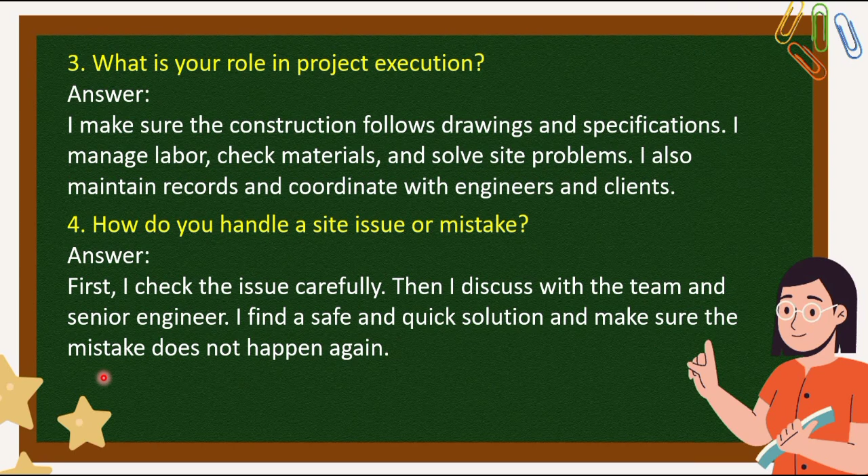Fifth question, what software do you use? The answer is, I use AutoCAD for drawings, MS Excel for reports and calculation, and sometimes Primavera or MS Project for planning. I also use estimation and billing tools.

Sixth question, what is the importance of safety on site? The answer is, safety saves lives and avoids accidents. It also saves time and money. I make sure workers wear PPE and follow safety rules like scaffolding, proper lifting, and warning signs.

Seventh question, how do you check quality on site? The answer is, I check materials, workmanship, and curing. I follow codes and standards. I also do cube tests, slump tests, and other field tests regularly.

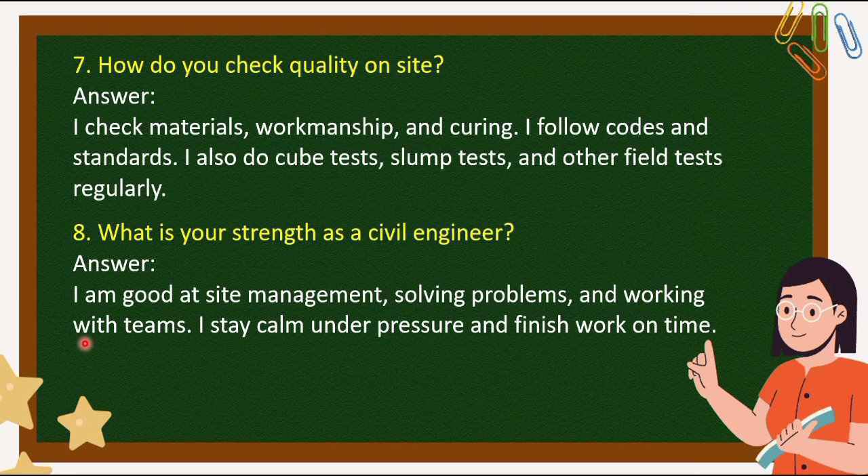Eighth question, what is your strength as a civil engineer? The answer is, I am good at site management, solving problems, and working with teams. I stay calm under pressure and finish work on time.

Ninth question, what is the difference between QA and QC? The answer is, QA, quality assurance, is a process to prevent mistakes. QC, quality control, is checking the actual work quality by testing and inspection.

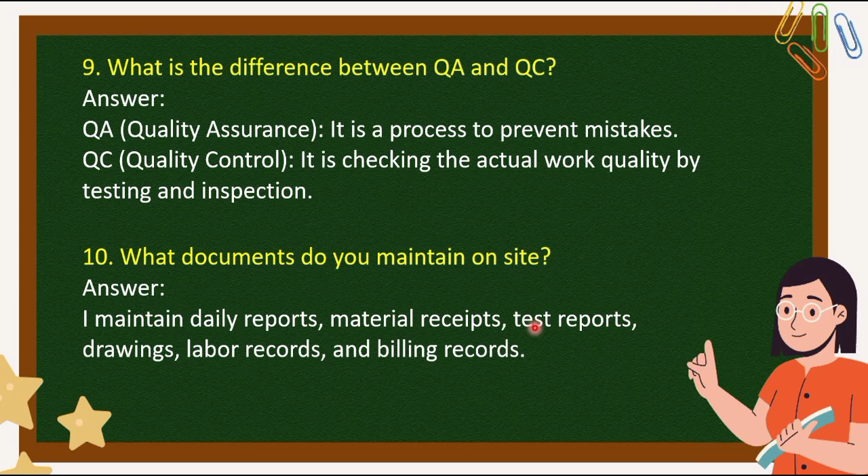Tenth question, what documents do you maintain on site? The answer is, I maintain daily reports, material receipts, test reports, drawings, labor records, and billing records.

Eleventh question, what is bar bending schedule, BBS? The answer is, BBS is a table showing the details of steel bars: size, length, number, shapes, and cutting length. It helps in steel estimation and avoids wastage.

Twelfth question, what steps do you take for concreting work? The answer is, check formwork, check reinforcement, slump test, pouring concrete, vibrating, curing properly.

Thirteenth question, how do you control wastage on site? The answer is, I use proper storage, train workers, plan materials use, and avoid rework.

Fourteenth question, what is your biggest achievement? The answer is, for example, I completed a multi-story building project 15 days before the deadline with zero safety issues.

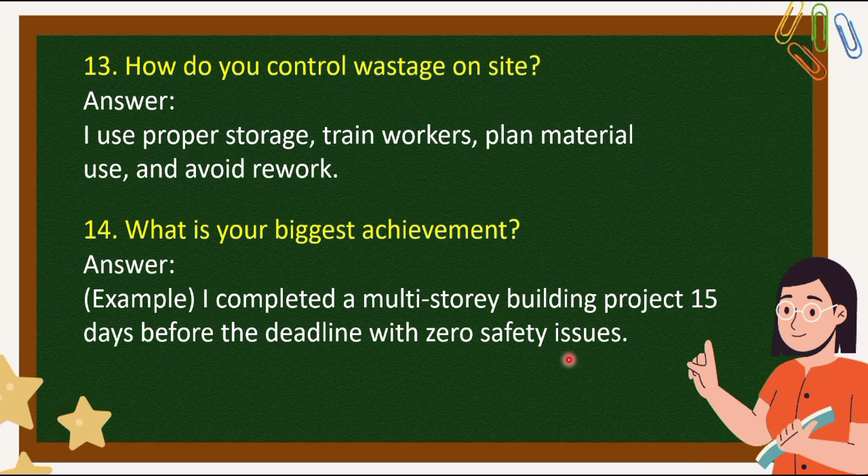Fifteenth question, why should we hire you? The answer is, I have good technical knowledge, field experience, and strong work ethics. I complete work on time with good quality and safety.

Sixteenth question, what is a one-way slab? The answer is, a slab supported on two opposite sides and bends in one direction.

Next question is, what is a two-way slab? The answer is, a slab supported on all four sides and bends in two directions.

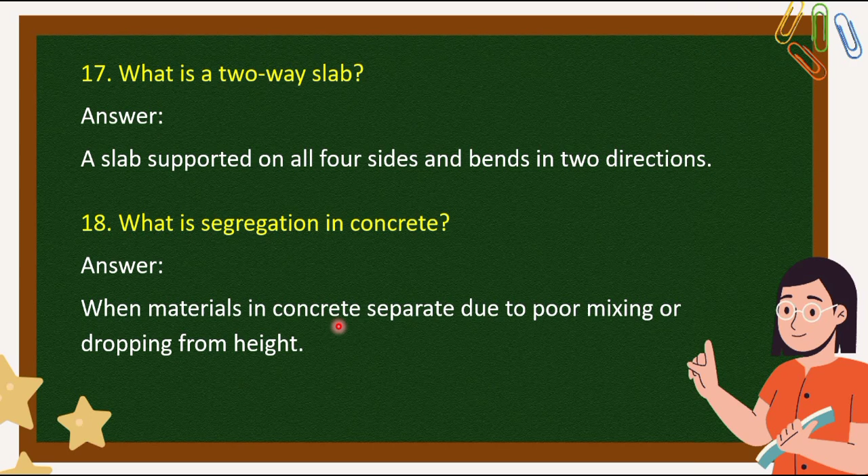Eighteenth question, what is segregation in concrete? The answer is, when materials in concrete separate due to poor mixing or dropping from height.

Nineteenth question, what is honeycombing? The answer is, voids or holes in concrete due to poor compaction or mix.

Twentieth question, what is a slump test? The answer is, a test to check the workability of fresh concrete.

Twenty-first question, what is a retaining wall? The answer is, a wall that holds back soil or water from one side.

What is camber in road? The answer is, a slope in the road surface for drainage of rainwater.

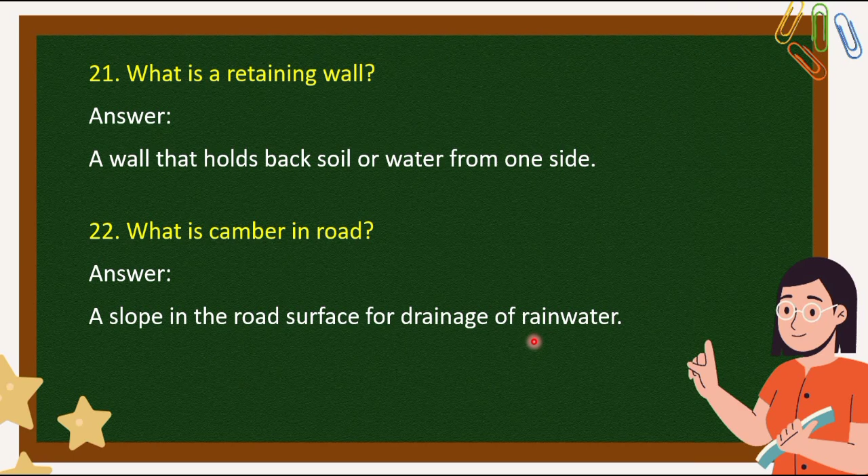Twenty-third question, what is lap length? The answer is, extra length given when two bars are joined to transfer load properly.

Twenty-fourth question, what is development length? The answer is, a length of bar required to safely transfer stress between steel and concrete.

What is pile foundation? The answer is deep foundation where long columns, piles, are used to transfer load to deep soil. What is compaction? The answer is the process of reducing air in soil to increase its strength.

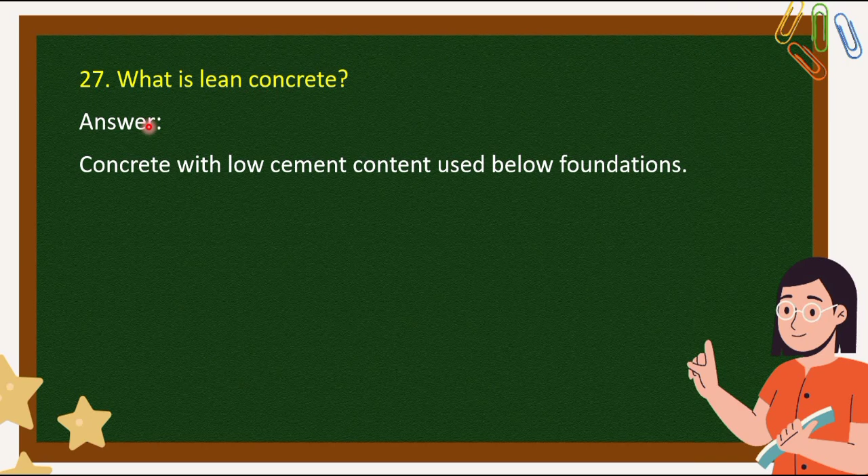What is lean concrete? The answer is concrete with low cement content used below foundations. What is the unit weight of steel? The answer is 7850 kg per cubic meter.

What is bleeding in concrete? The answer is when water comes out from the concrete surface after placing. What is efflorescence in brick? The answer is white powder on brick surface due to salt in water.

What is the minimum cover for RCC? The answer is for slab 15 to 20 mm, for beam 25 mm, for column 40 mm, for footing 50 mm.

What are the types of foundation? The answer is shallow foundations like isolated and raft, and deep foundations like pile and caisson.

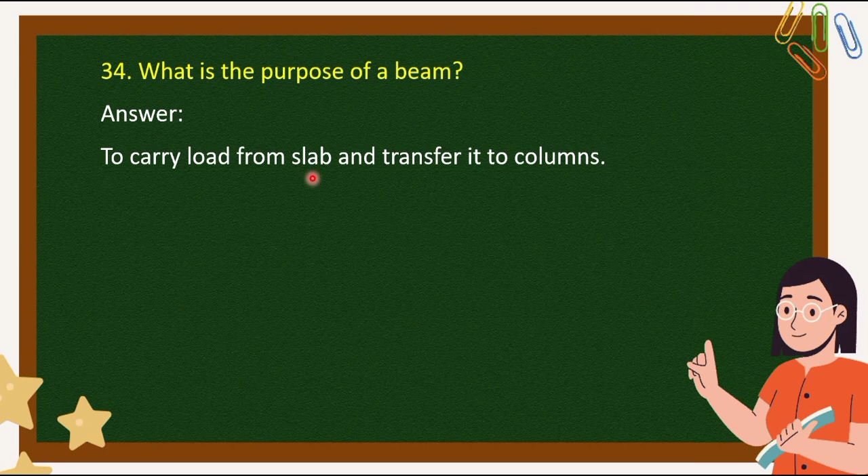What is a footing? The answer is the base part of a structure that spreads load to the soil. What is the purpose of a beam? The answer is to carry load from slabs and transfer it to columns.

What is a concrete grade? The answer is concrete strength after 28 days. For example, M20 means 20 MPa, megapascal.

What is curing time for slab? The answer is usually 7 to 14 days. What is a load bearing wall? The answer is a wall that carries load from above and transfers it to the foundation.

What is the difference between working and as-built drawings? The answer is working drawings are used during construction, and as-built drawings are the final drawings after construction.

What is the purpose of scaffolding? The answer is temporary support for workers during high level construction.

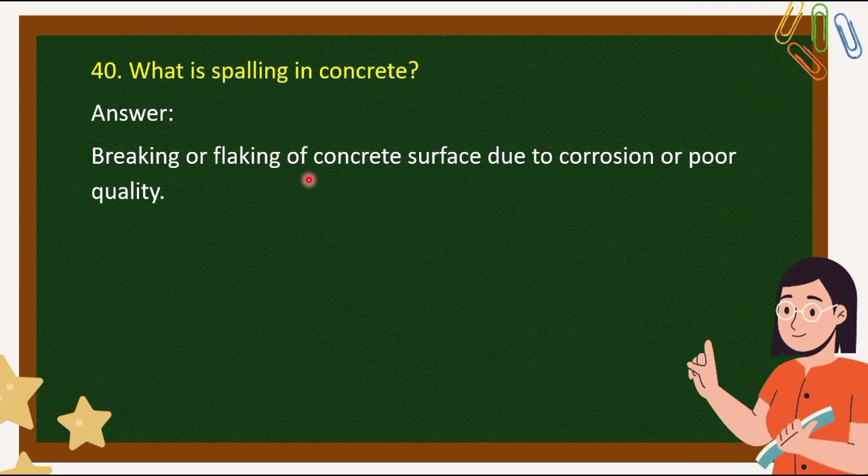What is spalling in concrete? The answer is breaking or flaking of concrete surface due to corrosion or poor quality.

What is shuttering removal time? The answer is for slab 14 days, for beam sides 7 days, and for column sides 24 to 48 hours.

What is a plinth beam? The answer is a beam built at plinth level to connect columns and prevent settlement cracks.

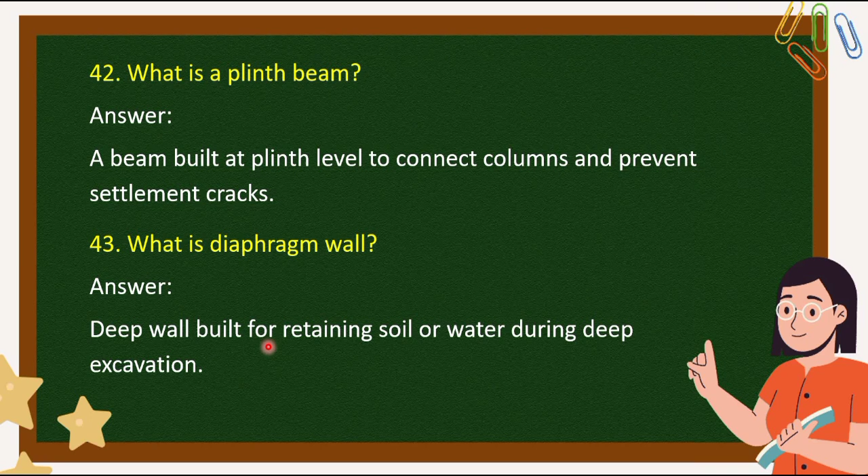What is a diaphragm wall? The answer is a deep wall built for retaining soil or water during deep excavation.

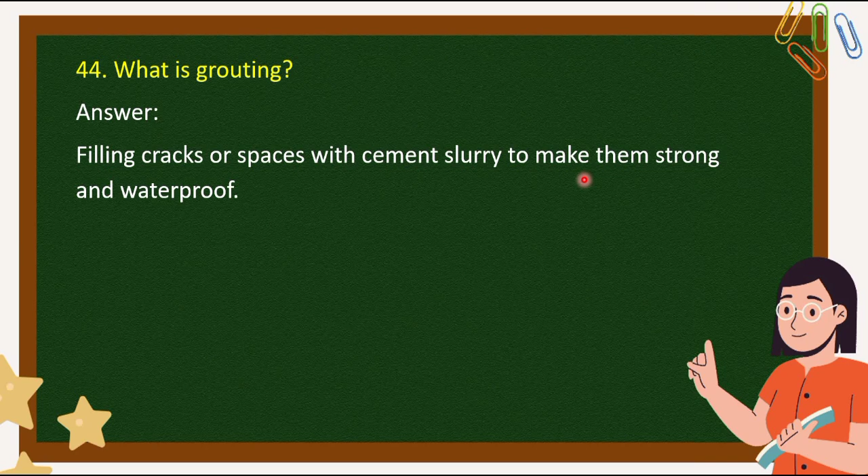What is grouting? The answer is filling cracks or spaces with cement slurry to make them strong and waterproof.

What is water cement ratio? The answer is the ratio of water to cement by weight in concrete. A lower ratio means stronger concrete.

What is pre-stressed concrete? The answer is concrete where steel is stretched before load is applied. It reduces cracks. What is the difference between contractor and subcontractor?

The answer is the contractor is the main company responsible for the project, and the subcontractor is hired by the contractor for specific work.

What is bitumen? The answer is black sticky material used in road construction as a binder.

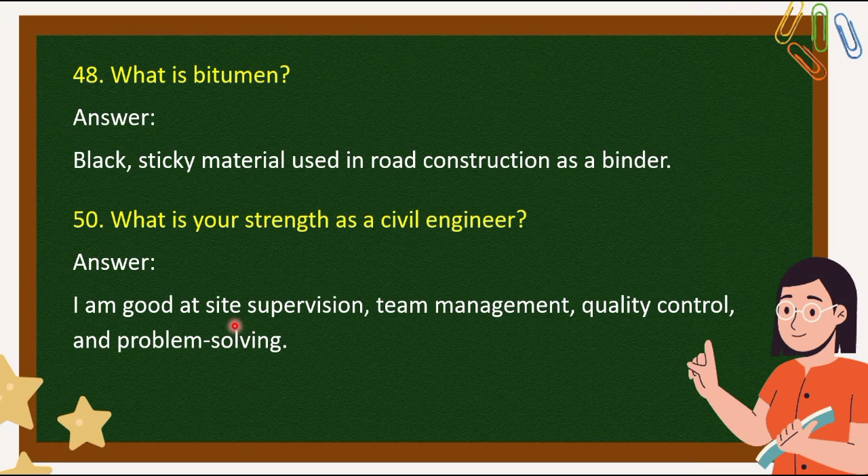What is your strength as a civil engineer? The answer is I am good at site supervision, team management, quality control and problem solving.

What is the purpose of a construction joint? The answer is it allows construction to be done in stages without cracks or weak points.

What is the minimum thickness of a concrete road? The answer is usually 150 mm to 300 mm depending on traffic load.

What is a cover block? The answer is a small concrete block placed under reinforcement to maintain cover.

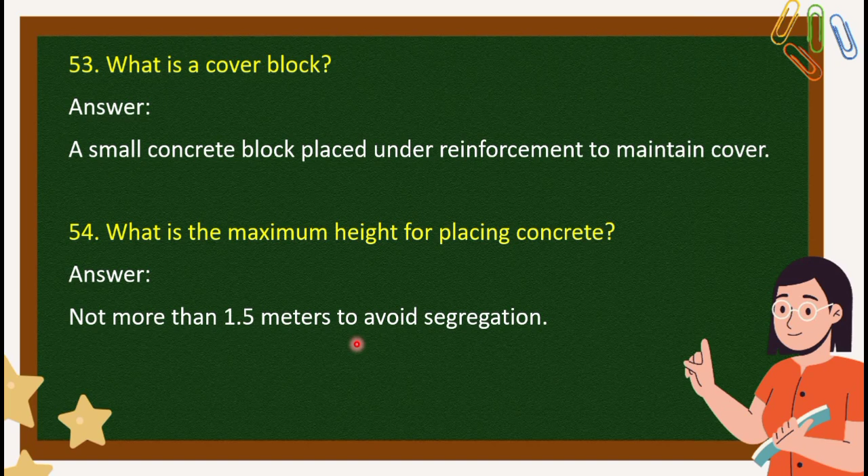What is the maximum height for placing concrete? The answer is not more than 1.5 meters to avoid segregation.

What is a mat raft foundation? The answer is a large thick slab supporting multiple columns, used in weak soil.

What is the role of admixture in concrete? The answer is admixtures improve workability, setting time and strength of concrete.

What is the difference between hardening and setting of concrete? The answer is setting is when concrete changes from liquid to solid, while hardening means concrete gains strength after setting.

What is a cantilever beam? The answer is a beam supported only at one end, like in balconies.

Question 59: What is a tie beam? The answer is a beam that connects two columns to reduce buckling and give stability.

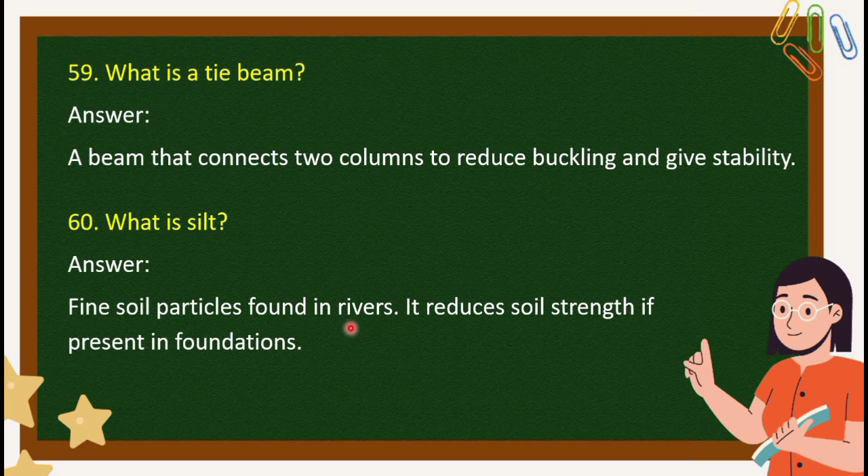Question 60: What is silt? The answer is fine soil particles found in rivers. It reduces soil strength if present in foundations.

Question 61: What is scaffolding made of? The answer is made of steel pipes or bamboo with wooden planks.

What is the typical height of a floor in buildings? The answer is usually 3 meters or 10 feet, including slab and beams.

What is geotechnical investigation? The answer is testing of soil before construction to check its strength and properties.

Question 64: What is a superstructure and substructure? The answer is substructure means below ground foundation. Superstructure means above ground columns, slabs, beams.

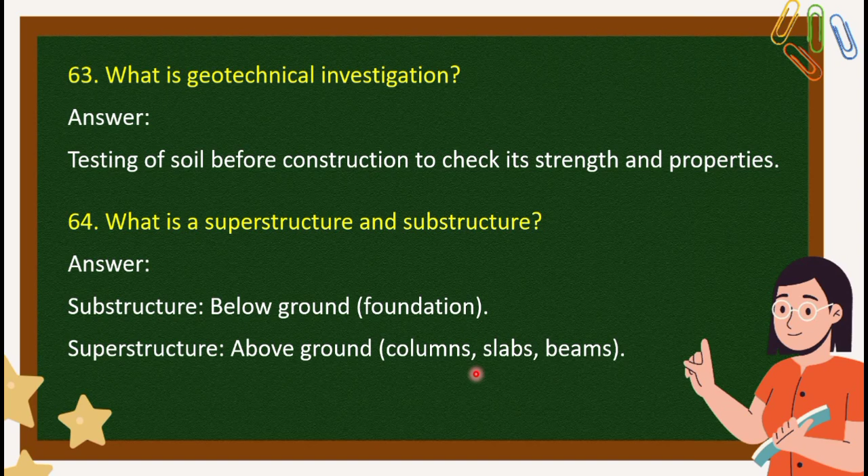Question 65: What is a tender in construction? The answer is a document to invite bids for a construction project.

Question 66: What is a bill of quantities? The answer is a detailed list of materials, labor, and cost for a project.

Question 67: What is the difference between estimation and costing? The answer is estimation means approximate quantity and cost before starting work, while costing means actual expenses after work is done.

What is curing compound? The answer is a chemical sprayed on concrete to retain moisture for curing.

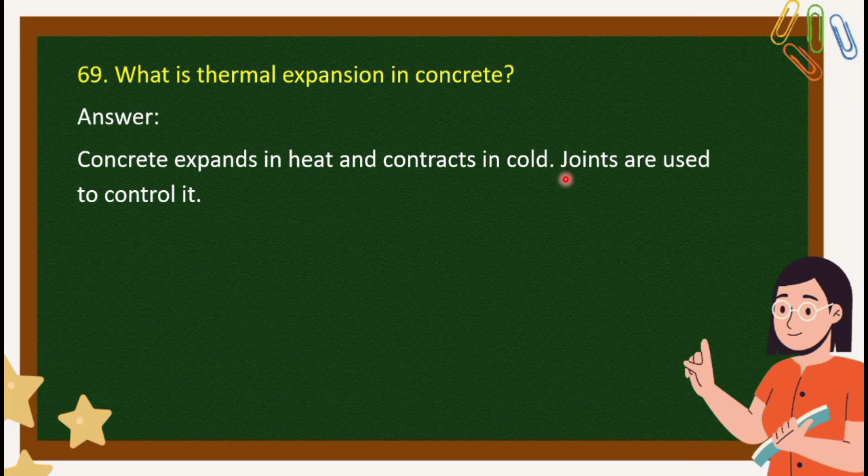What is thermal expansion in concrete? The answer is concrete expands in heat and contracts in cold. Joints are used to control it.

What is the purpose of a dowel bar? The answer is to transfer load and allow movement between concrete slabs.

What is the difference between sand and M sand? The answer is sand is natural river sand, while M sand means manufactured sand from crushed stone.

Question 72: What is a water bar? The answer is a strip placed at joints to stop water leakage.

What is a gable wall? The answer is the triangular upper part of a wall at the end of a pitched roof.

What is a parapet wall? The answer is a low wall at the edges of a roof or balcony for safety.

What is the use of fiber in concrete? The answer is it improves crack resistance and strength.

What is bituminous concrete? The answer is road material made of bitumen and aggregate for flexible pavements.

What is the difference between flexible and rigid pavements? The answer is flexible pavements use bitumen roads, while rigid pavements use concrete roads.

What is shear force? The answer is a force that tries to cut a section of a structure.

What is bending moment? The answer is a moment that causes a beam or structure to bend.

What is the role of a site engineer? The answer is to supervise construction, check drawings, manage labor, and ensure safety and quality.

Question 81: What is a construction schedule? The answer is a timeline of tasks in a project used to plan and track progress.

What is the role of a civil engineer in QA and QC? The answer is to check materials, workmanship, and testing reports to ensure quality.

What is carbonation in concrete? The answer is a chemical reaction between carbon dioxide and cement that reduces durability.

What is the modulus of elasticity of steel? The answer is 2 multiplied by 10 to the power 5 Newton per square mm, or 200 GPa.

What is the maximum free fall of concrete? The answer is 1.5 meters, to avoid segregation.

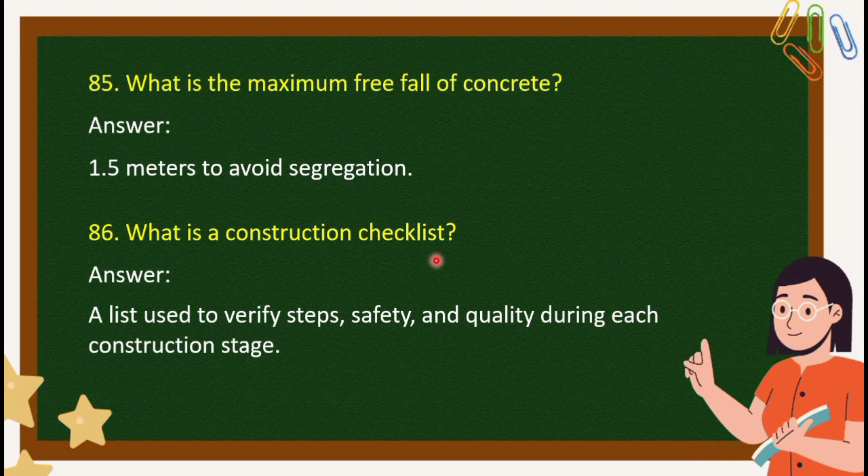What is a construction checklist? A list used to verify steps, safety, and quality during each construction stage.

What is a batter pile? The answer is a pile driven at an angle to resist horizontal loads.

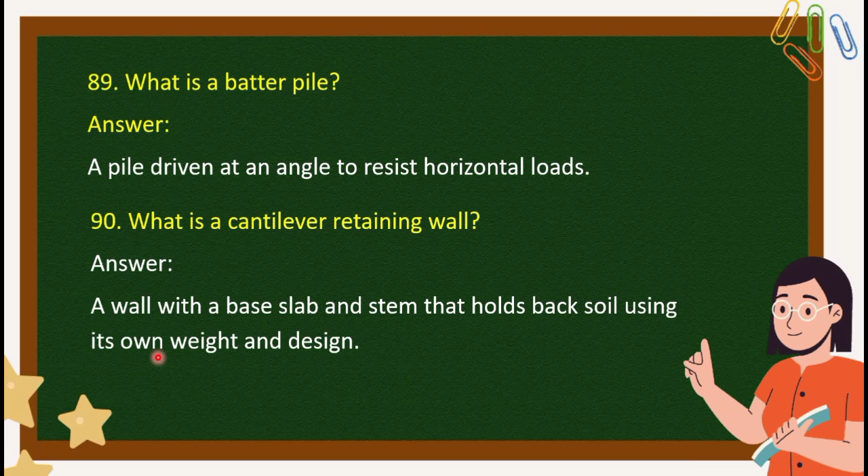Question 90: What is a cantilever retaining wall? The answer is a wall with a base slab and stem that holds back soil using its own weight and design.

What is creep in concrete? The answer is slow deformation of concrete under constant load over time.

Question 92: What is shrinkage? The answer is reduction in volume of concrete as it dries and hardens.

Question 93: What is construction waste management? The answer is proper disposal and reuse of construction materials to reduce waste.

What is a load test on slab? The answer is a test to check if the slab can carry the required load safely.

Question 95: What is initial and final setting time of cement? The answer is initial setting time is 30 minutes and final setting time is 10 hours.

What is a dead load? The answer is permanent load from the structure itself, like walls, slabs, etc.

Question 97: What is a live load? The answer is temporary loads like people, furniture, vehicles.

What is the difference between IS code and IRC code? IS code means building standards. IRC code is used for road construction standards.

What is anchorage length? The answer is the minimum length of bar beyond support to ensure bonding.

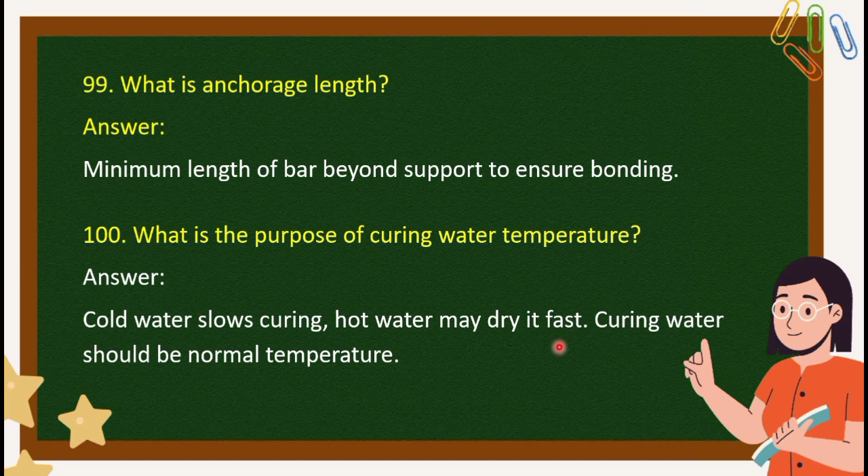What is the purpose of curing water temperature? The answer is cold water causes slow curing, hot water may dry it fast. Curing water should be at normal temperature.

What is the difference between primary and secondary survey? The answer is primary survey covers a large area with more accuracy using triangulation. Secondary survey covers a small area with less accuracy using chain or compass survey.

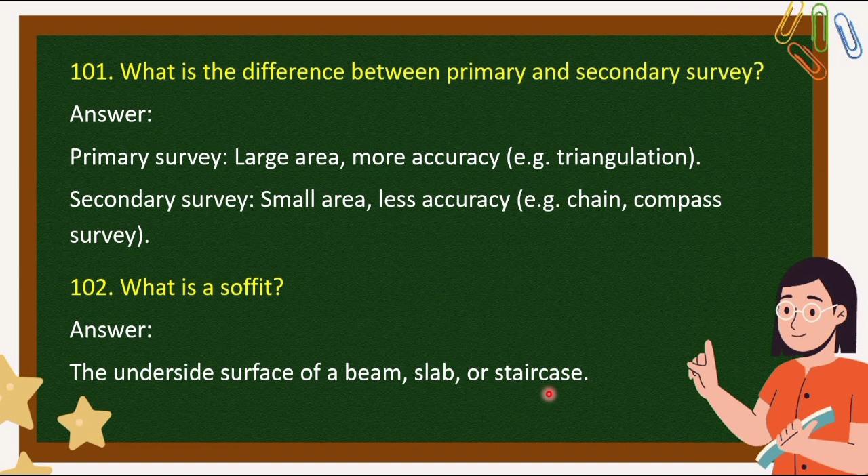Question 102: What is a soffit? The answer is the underside surface of a beam, slab, or staircase.

What is the function of a weep hole? The answer is small holes in the retaining wall to allow water to drain out.

What is scaffolding load? The answer is the weight carried by scaffolding, including workers, tools, and materials.

What is lateral pressure? The answer is pressure exerted sideways, like soil against retaining walls.

What is a pre-stressing force? The answer is the force applied to tendons in concrete before loading to improve strength.

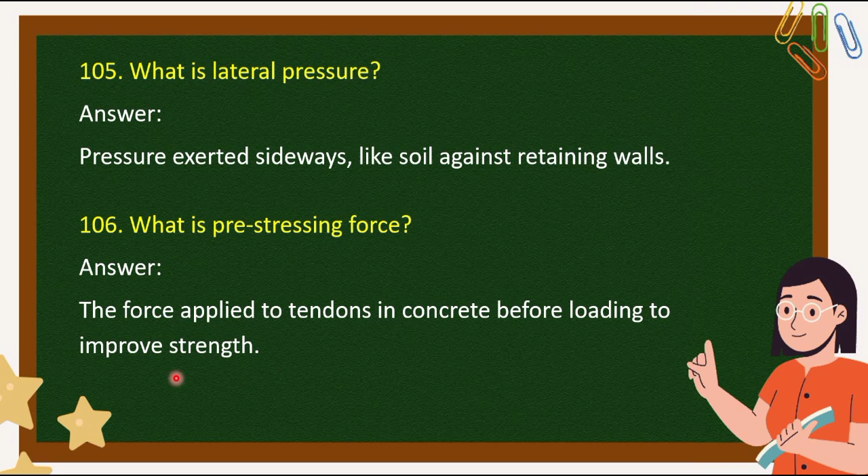What is geogrid? The answer is a synthetic material used to strengthen soil in retaining walls and roads.

What is infiltration? The answer is the process of water entering the soil from the surface.

What is a screed in concrete? The answer is a flat board or tool used to level the top surface of concrete.

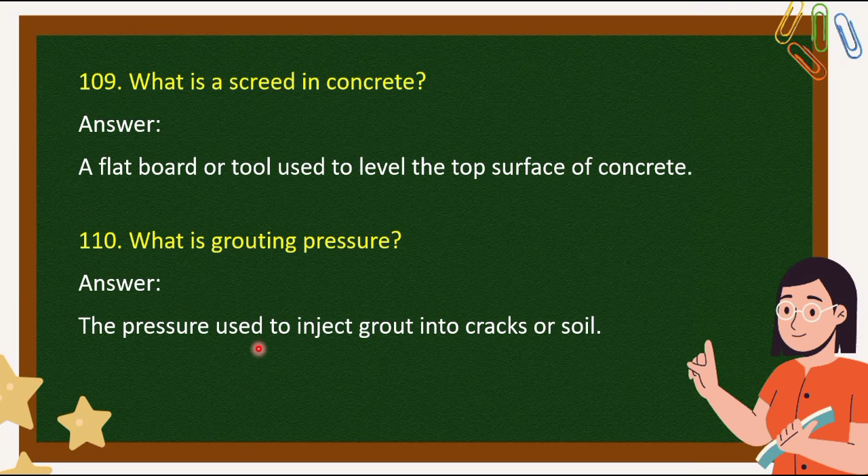What is grouting pressure? The answer is the pressure used to inject grout into cracks or soil.

What is shrinkage limit of soil? The answer is the moisture content below which further drying does not reduce volume.

What is pile cap? The answer is a thick concrete slab that joins the top of piles to support the structure.

Question 113: What is bearing capacity? The answer is the maximum load soil can support without failure.

What is the purpose of a core cutter test? The answer is to find the in situ density of soil.

What is contour interval? The answer is the vertical distance between two contour lines.

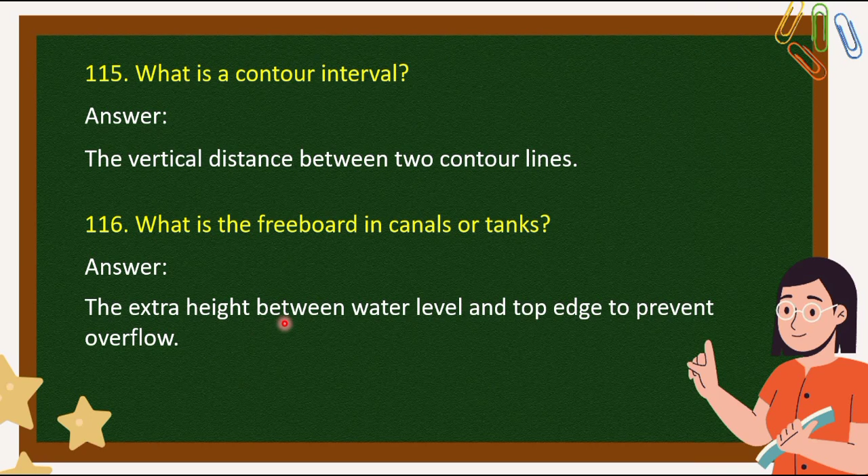What is the freeboard in a canal or tank? The answer is the extra height between water level and top edge to prevent overflow.

What is a deep beam? The answer is a beam with a small span but large depth, used in tanks and transfer girders.

What is live load reduction? The answer is a reduction in total live load when designing based on load distribution.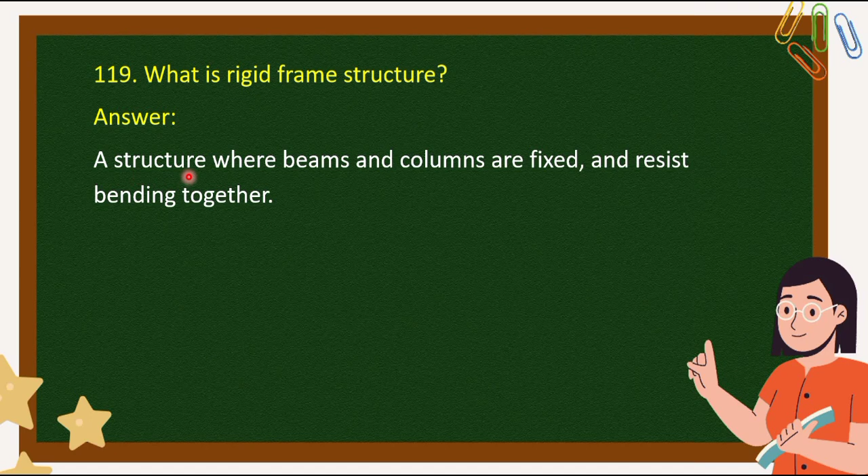Question 119: What is a rigid frame structure? The answer is a structure where beams and columns are fixed and resist bending together.

Question 120: What is a shear wall? The answer is a vertical wall that resists lateral forces like wind or earthquake.

What is a fish plate in steel structure? The answer is a metal plate used to join two steel sections.

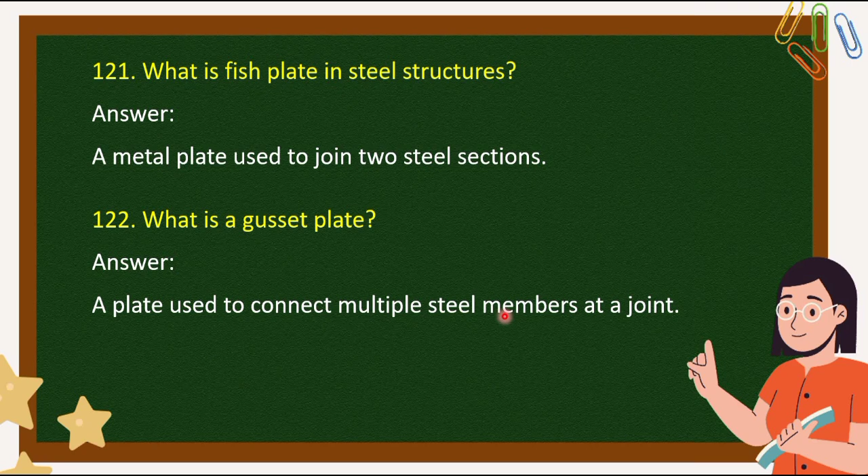Question 122: What is a gusset plate? It is a plate used to connect multiple steel members at a joint.

What is a haunch in beam? The answer is an increase in depth near supports to resist higher bending.

What is splicing in reinforcement? The answer is connecting two steel bars to continue reinforcement.

What is proof stress? The stress at which a material shows small permanent deformation.

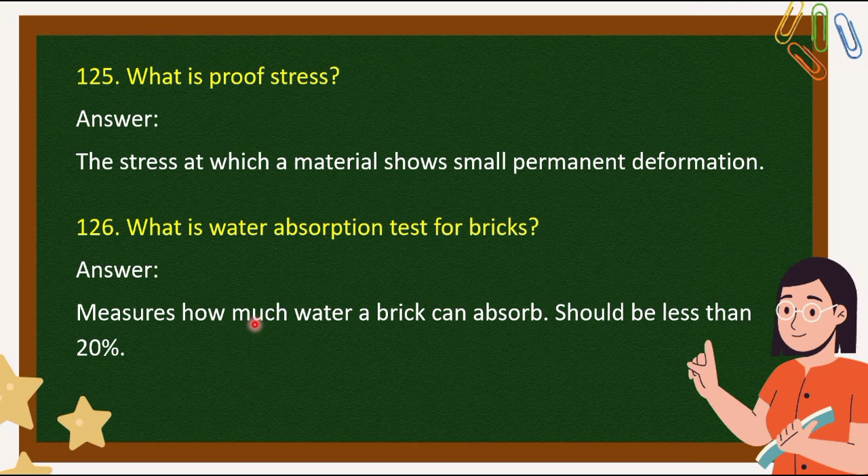What is the water absorption test for brick? The answer is to measure how much water a brick can absorb. It should be less than 20%.

Question 127: What is bulkage in sand? It is the increase in sand volume when wet due to water films around particles.

Question 128: What is earthwork in excavation? The answer is removing or adding soil for construction, like digging trenches or filling.

What is a tremie pipe? The answer is a pipe used to place concrete underwater without washing out the cement.

Question 130: What is eccentricity in column? The answer is the distance between the load center and the column center.

Question 131: What is a culvert? The answer is a small bridge or pipe to allow water to pass under a road or railway.

Question 132: What is a cross section? The answer is a cut-through view of a structure to show internal details.

133 number question: What is a pile load test? The answer is a test to check the load bearing capacity of a pile.

What is pile integrity test? The answer is a test to check for cracks or defects inside piles.

What is a girder? The answer is a large horizontal steel or concrete beam that supports smaller beams.

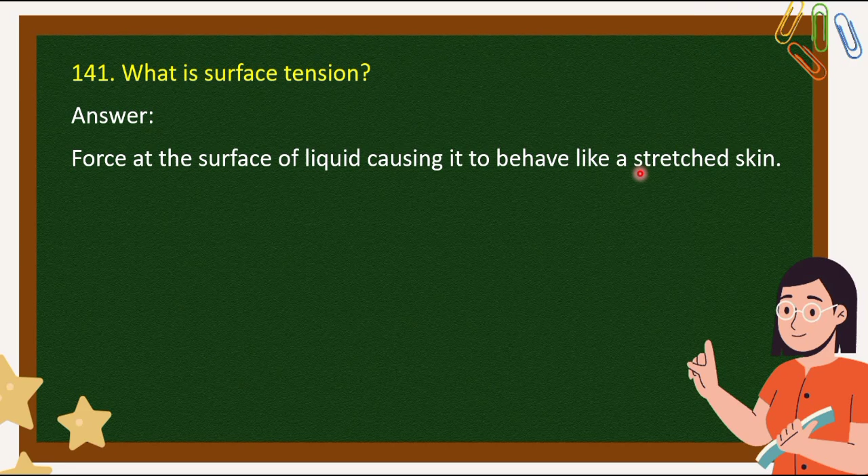142 number question: What is modulus of rupture? The answer is the measure of a material's strength in bending, also known as flexure strength.

143 number question: What is a punching shear? The answer is shear force around columns in slabs or footing that causes punching failure.

What is thermal cracking? The answer is crack caused by temperature changes in concrete.

What is a plinth protection? The answer is a concrete strip around a building to protect the plinth from water.

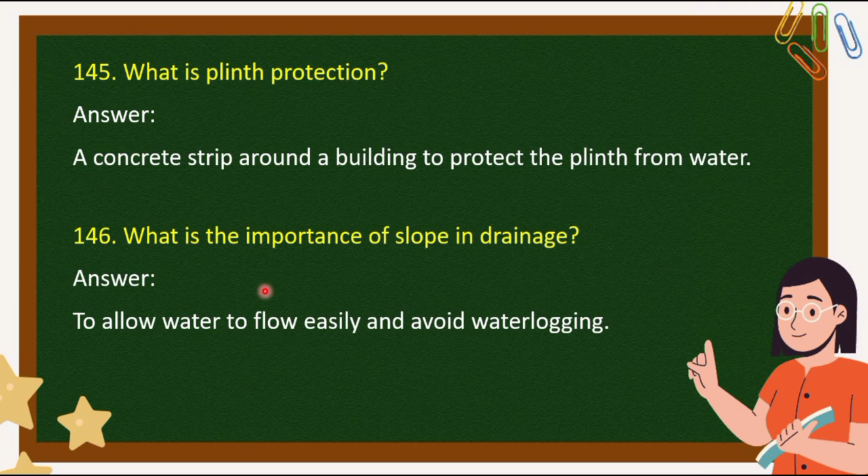146 number question: What is the importance of slope in drainage? The answer is to allow water to flow easily and avoid waterlogging.

147 number question: What is a ledger in scaffolding? The answer is a horizontal tube supporting the working platform.

148 number question: What is a sill level? The answer is the level where the bottom of a window is placed.

What is NDT, non-destructive testing? The answer is testing like rebound hammer and ultrasonic test that do not damage concrete.

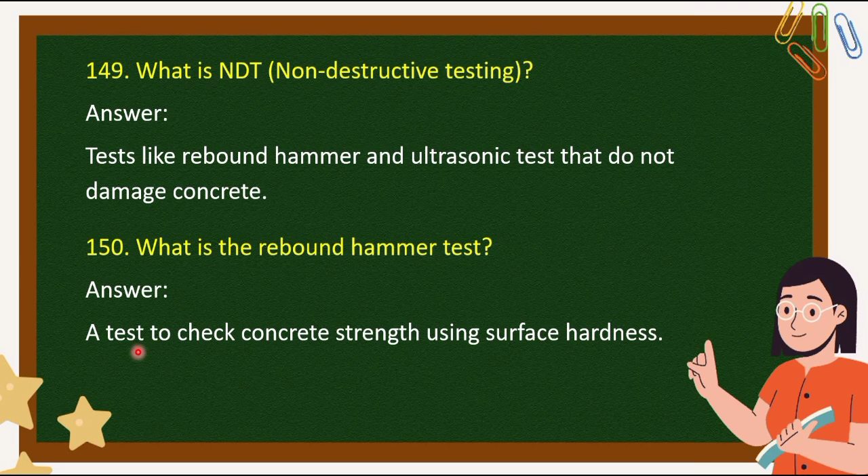150 number question: What is the rebound hammer test? The answer is a test to check the concrete strength using surface hardness.

151 number question: What is the moment of inertia? The answer is a measure of an object's resistance to bending or rotation.

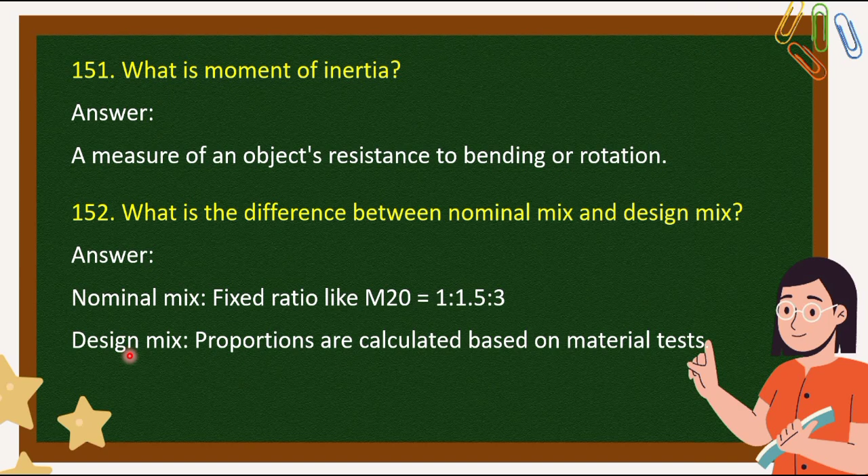152 number question: What is the difference between nominal mix and design mix? The answer is nominal mix is a fixed ratio like M20 1:1.5:3, and design mix proportions are calculated based on material tests.

What is an expansion joint in bridges? The answer is a joint that allows expansion and contraction due to temperature.

What is a cantilever retaining wall? The answer is a retaining wall with a base slab and vertical stem held by its own weight.

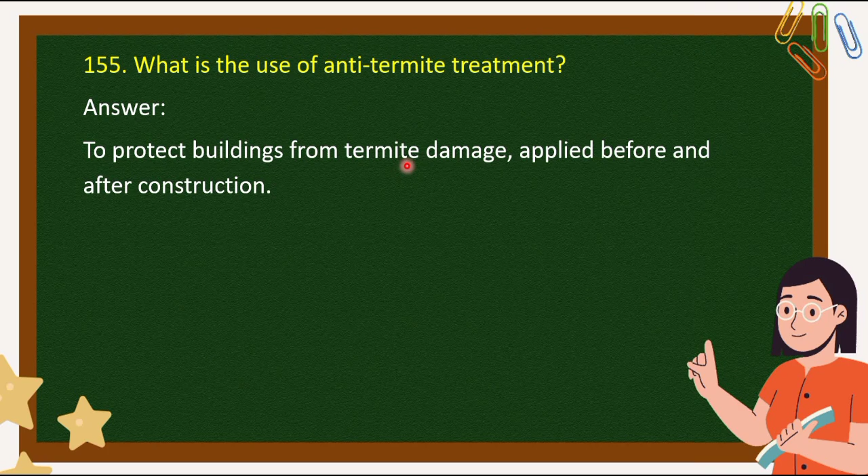What is the use of anti-termite treatment? The answer is to protect buildings from termite damage, applied before and after construction.

What is a dome in architecture? The answer is a rounded roof structure usually seen in temples, mosques, and auditoriums.

What is a parapet? The answer is a small wall along the edge of a roof, terrace, or balcony.

What is the clear cover for footings? The answer is usually 50 mm to protect steel from soil and corrosion.

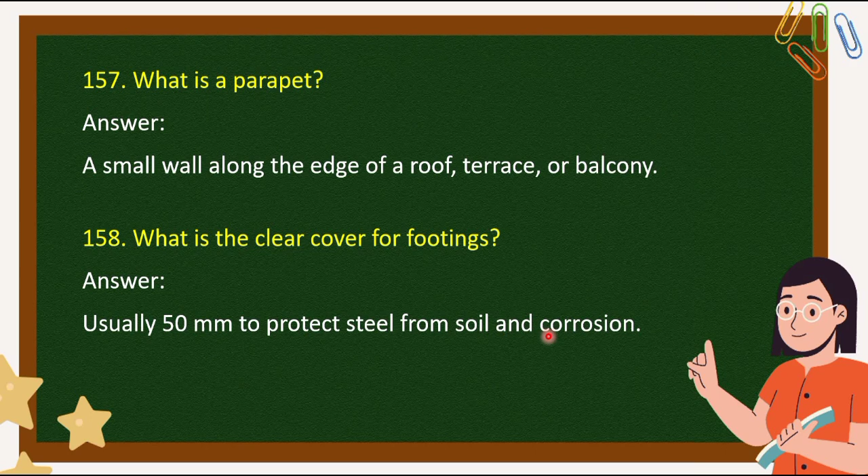What is shuttering oil? The answer is oil applied to formwork to prevent concrete from sticking.

What is de-shuttering? The answer is the removal of formwork after the concrete gains strength.

What is the purpose of a base plate in steel column? The answer is to transfer the load from the column to the foundation safely.

What is bleeding in concrete? The answer is when excess water rises to the top after concrete is poured.

What is lean mix? The answer is concrete with low cement content used for leveling and below footings.

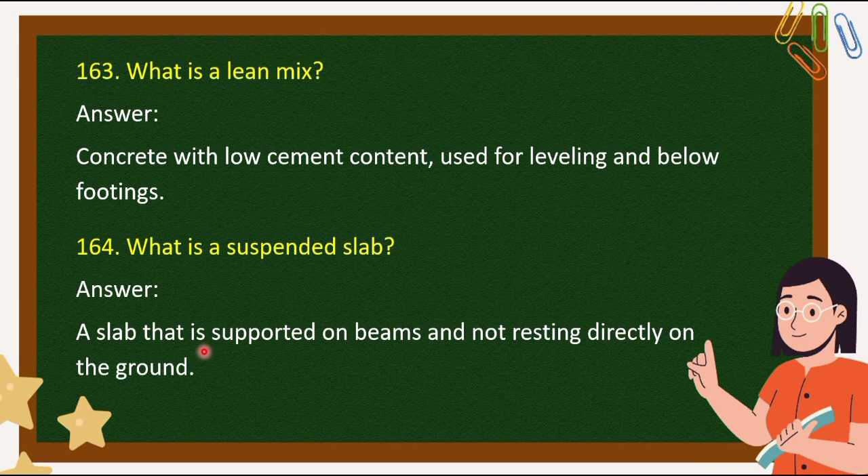164 number question: What is a suspended slab? The answer is a slab that is supported on beams and not resting directly on the ground.

What is seismic zone? The answer is a region classified by the level of earthquake risk.

166 number question: What is a hydrometer test? The answer is a test to find the particle size distribution of fine soil.

What is the crushing strength of brick? The answer is minimum 3.5 Newton per square millimeter. For common bricks it varies by type.

What is diaphragm action in slabs? The answer is the slab acts as a horizontal beam to resist lateral loads.

What is the effect of over vibration in concrete? It causes segregation and weakens the concrete.

What is the standard size of a concrete cube for testing? The answer is 150 mm by 150 mm by 150 mm.

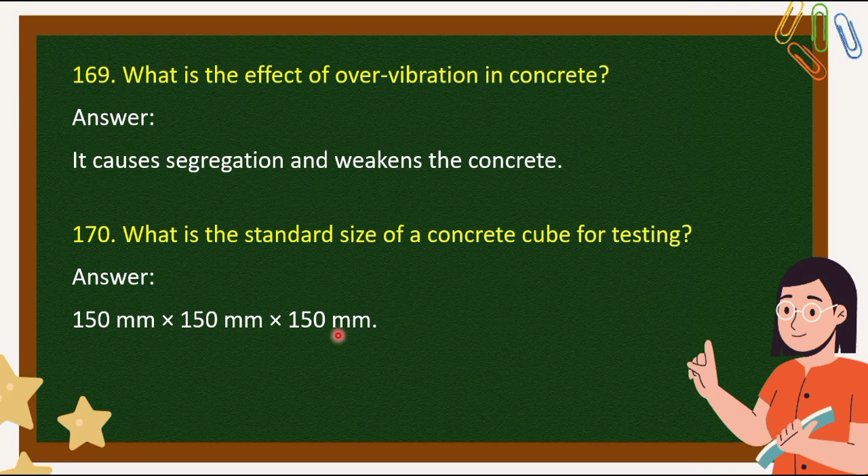What is the minimum water cement ratio for M20 grade concrete? The answer is about 0.5 depending on condition and standards.

Question 173. What is carbonation depth test? The answer is it is used to measure how deep carbonation has affected concrete.

What is bond in brick masonry? The answer is arrangement of bricks for strength and appearance.

What is a waffle slab? The answer is a slab with a grid pattern underneath for long spans and heavy loads.

What is arch action? A method where loads are transferred along curved paths, reducing bending.

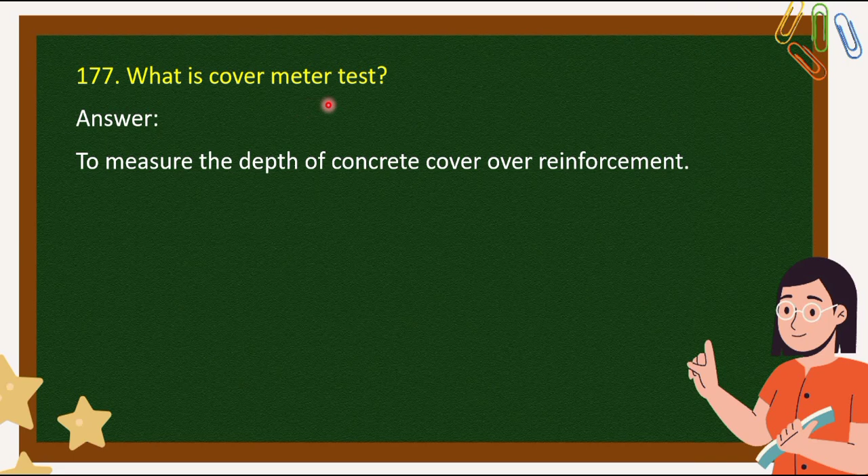What is cover meter test? The answer is to measure the depth of concrete cover over reinforcement.

What is initial setting time of cement? Minimum 30 minutes.

What is air entrainment in concrete? The answer is air bubbles added to improve workability and freeze resistance.

What is a retaining structure? The answer is any structure designed to hold soil, water, or other materials.

What is precast concrete? The answer is concrete parts cast in a factory or yard and brought to site.

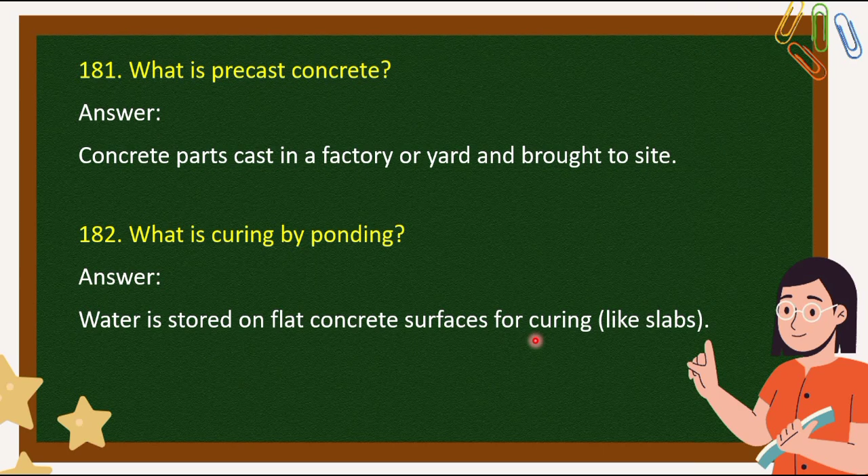What is curing by ponding? The answer is water is stored on a flat concrete surface for curing, like slabs.

What is the cause of foundation failure? The answer is poor soil, uneven settlement, wrong design, and excess load.

Question 184. What is a Kelly bar? The answer is a part of a rotary drilling rig used in bore pile construction.

What is a diaphragm wall used for? The answer is used in deep basement or retaining wall during excavation.

What is the bearing capacity of hard rock? The answer is more than 1000 kilonewton per square meter depending on the rock type.

What is damp-proof course? The answer is a layer to stop moisture from rising through walls from the ground.

What is the water absorption limit of good brick? The answer is it should not be more than 20% by weight.

What is a pile shoe? The answer is a metal tip at the end of a pile for easier driving and better grip in soil.

Question 190. What is a soil nailing technique? The answer is reinforcing soil with steel bars to make it stable during excavation.

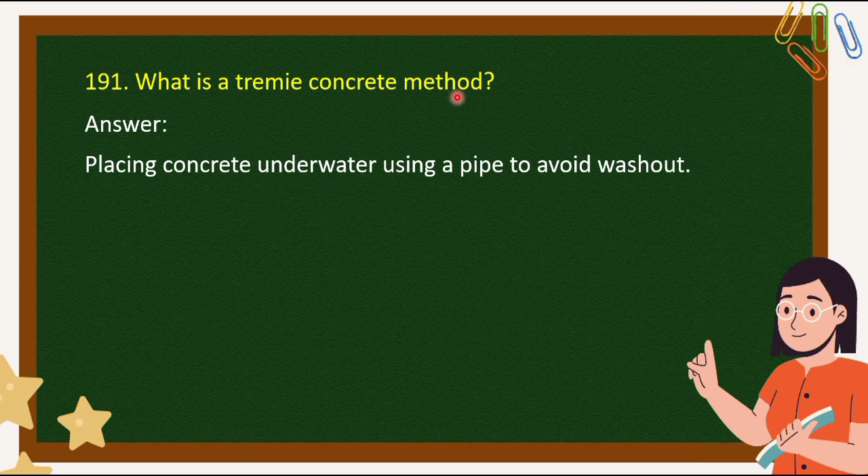What is a tremie concrete method? The answer is placing concrete underwater using a pipe to avoid wash out.

What is modulus of subgrade reaction? The answer is soil stiffness under a slab, denoted as K, used in pavement design.

What is a grade beam? The answer is a horizontal beam at ground level to support walls and carry loads to footings.

What is formwork stripping oil? The answer is oil applied on formwork to ease removal after concrete sets.

What is the difference between screed and floor topping? The answer is screed is the leveling layer, topping is the final hard wearing surface.

What is a pier in bridges? The answer is a vertical support between two spans of a bridge.

What is a wing wall? The answer is a wall attached to an abutment to retain earth and guide water.

What is a concrete cover block made of? The answer is cement mortar and plastic to provide spacing between steel and formwork.

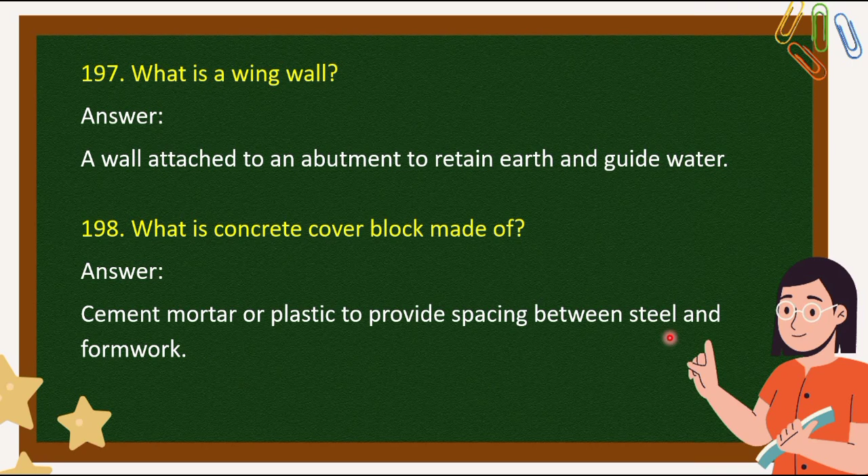Question 199. What is dynamic compaction? The answer is compacting soil by dropping heavy weights repeatedly.

Question 200. What is a cold joint in concrete? The answer is a weak joint formed when new concrete is placed over hardened concrete without bonding.

What is the curing time for brickwork? The answer is usually 7 days to keep it moist and gain strength.

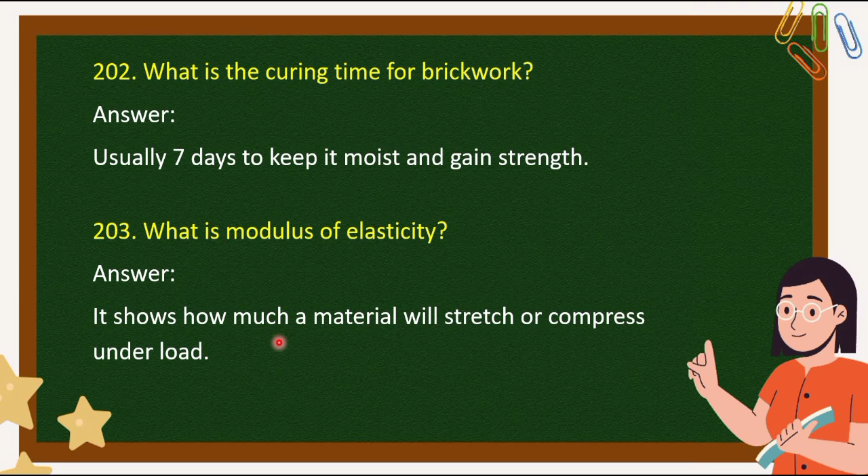What is modulus of elasticity? The answer is it shows how much a material will stretch or compress under load.

What is the standard height of a floor in buildings? The answer is usually 3 meters or 10 feet.

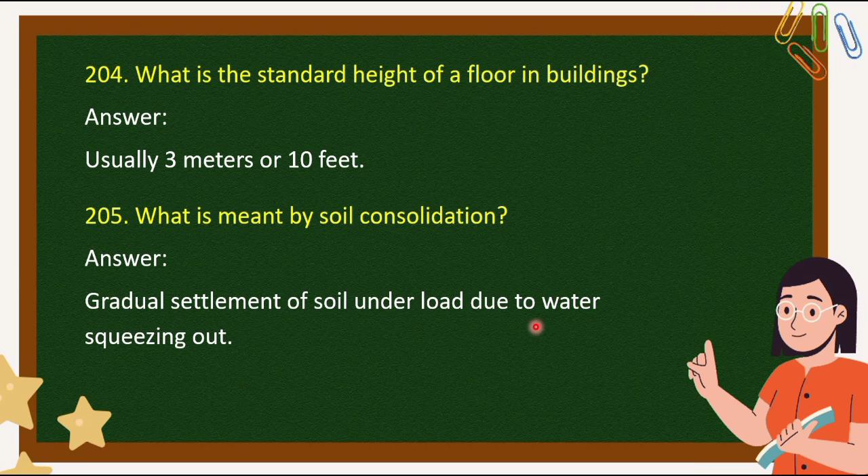What is meant by soil consolidation? The answer is gradual settlement of soil under load due to water squeezing out.

What is bulking of sand? The answer is when sand volume increases due to moisture content.

What is honeycombing in concrete? The answer is voids or holes in concrete due to poor compaction.

What is the slump range for columns? The answer is 100 to 150 mm for easy pouring.

What is dry lean concrete, DLC? The answer is low cement concrete used as a base layer under pavement.

What is FE 415 and FE 500? The answer is types of steel bar with yield strength of 415 MPa and 500 MPa.

What is bar bending schedule? The answer is a list of all steel bars with size, lengths, and bending details.

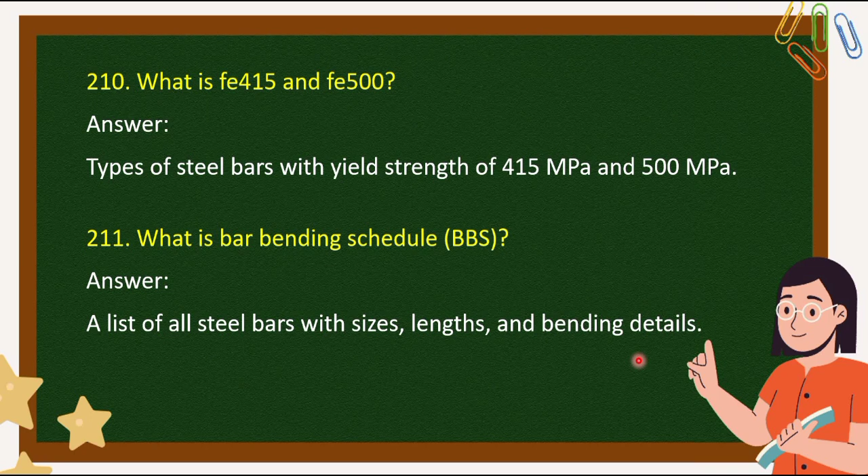What is anchorage length in steel bar? The answer is the minimum length needed to fix a bar properly in concrete.

What is minimum thickness of slab? Usually 100 mm for residential buildings.

What is crank bar in slab? The answer is bend portion of bar to support at beam slab junction.

What is pre-tensioning? The answer is steel is stretched before concrete is poured in pre-stressed concrete.

What is post-tensioning? The answer is steel is stretched after concrete hardens.

What is pile cap? The answer is fixed slab connecting group of piles to distribute load.

What is floating column? The answer is a column that rests on a beam, not directly on the foundation.

What is bearing wall? The answer is a wall that supports weight from above floor or roof.

What is a lintel? The answer is a beam above door or window to carry wall load.

What is camber in road? The answer is a slight slope from center to sides to drain rainwater.

What is prefabrication? The answer is parts made in factory and joined at the site.

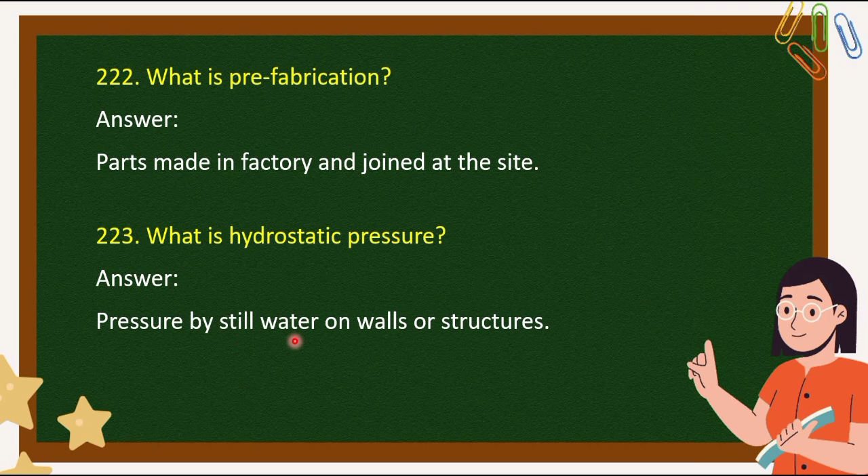What is hydrostatic pressure? The answer is pressure by still water on walls or structures.

What is RCC? The answer is reinforced cement concrete with steel bars inside.

What is PPC cement? The answer is Portland Pozzolana cement has fly ash, gives better durability.

What is OPC cement? The answer is ordinary Portland cement gives faster strength.

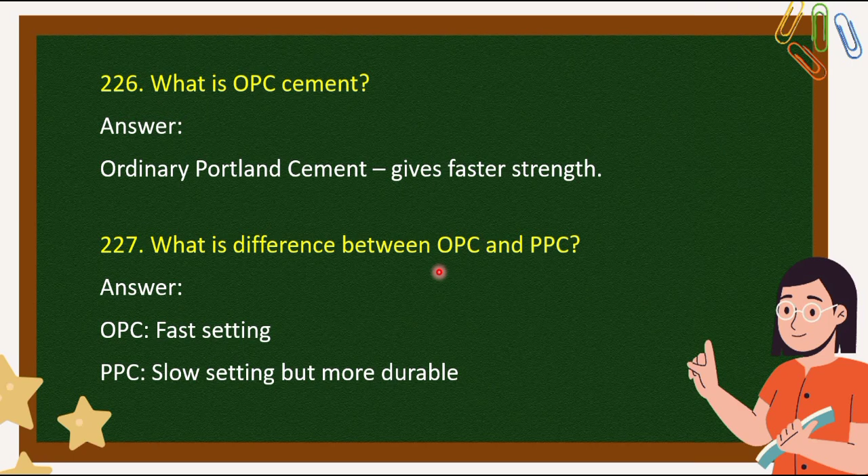What is difference between OPC and PPC? The answer is OPC is fast setting, PPC is slow setting but more durable.

What is site clearance? The answer is removing trees, bushes and old structures before starting work.

What is demolition plan? The answer is step-by-step plan to safely break old buildings.

What is waterproofing? The answer is protecting structure from water entry using chemicals or layers.

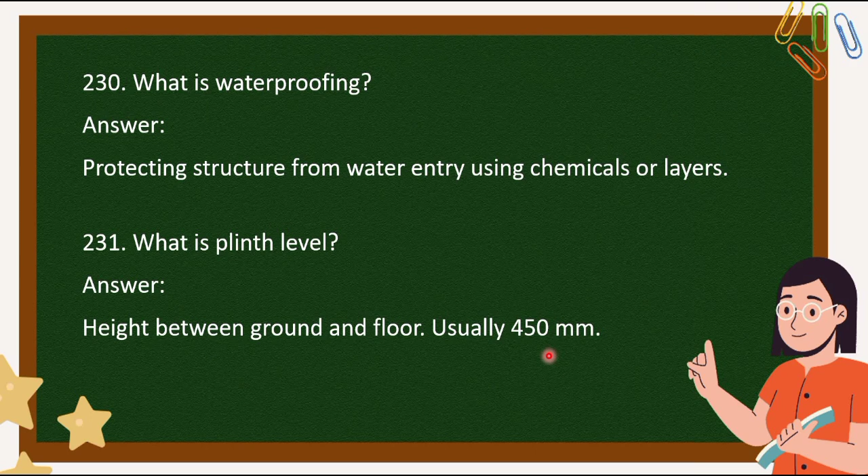What is plinth level? The answer is height between ground and floor, usually 450 mm. What is pointing in masonry?

The answer is finishing of mortar joints for protection and appearance.

What is a bar chart? The answer is a time-based schedule to track construction activities.

What is critical path in construction? The answer is the longest path in project that decides total time.

What is factor of safety? The answer is a safety margin to avoid failure. Usually, factor of safety is equal to load carrying divided by actual load.

What is concrete mix design? The answer is finding best ratio of cement, sand and aggregate for strength.

What is settlement in buildings? The answer is downward movement due to soil compression under foundation.

What is scaffolding? The answer is temporary structure to support workers and materials at height.

What is the angle of repose? The answer is steepest angle at which soil remains stable.

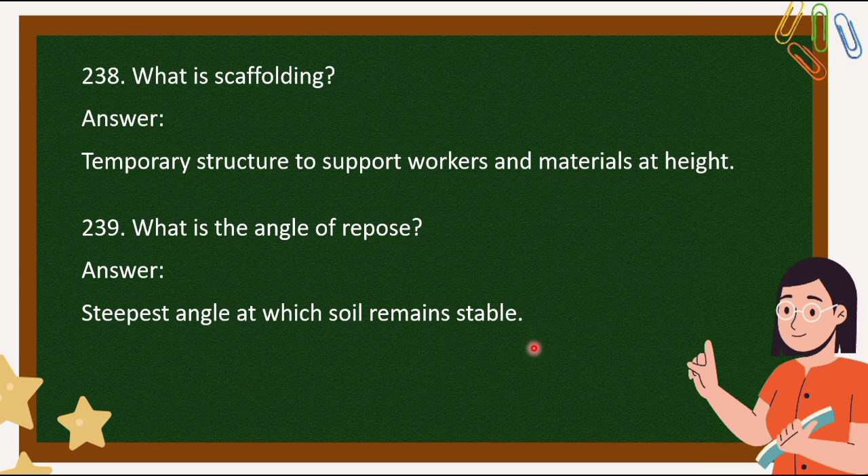What is a grout? The answer is fluid material used to fill cracks or gaps in concrete.

What is wind load? The answer is force exerted by wind on buildings.

What is ductility of steel? The answer is ability to stretch without breaking.

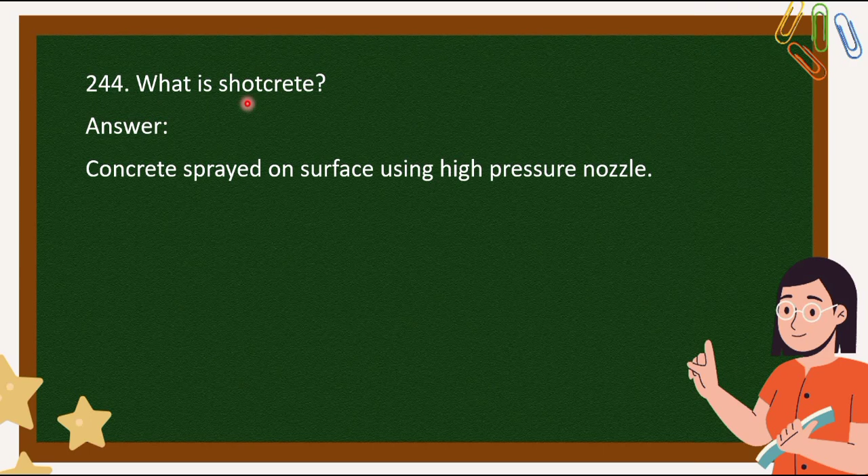What is shotcrete? The answer is concrete sprayed on surface using high pressure nozzle.

What is a rebound hammer test? The answer is a simple test to estimate surface strength of concrete.

What is permeability of concrete? The answer is how easily water or gas passes through concrete.

What is corrosion in reinforcement? The answer is rusting of steel due to moisture and chemicals.

What is shrinkage crack? The answer is crack due to loss of water and volume reduction in concrete.

What is QA in construction? The answer is quality assurance, a planned system to ensure quality.

What is QC in construction? The answer is quality control, testing and inspection to maintain quality.

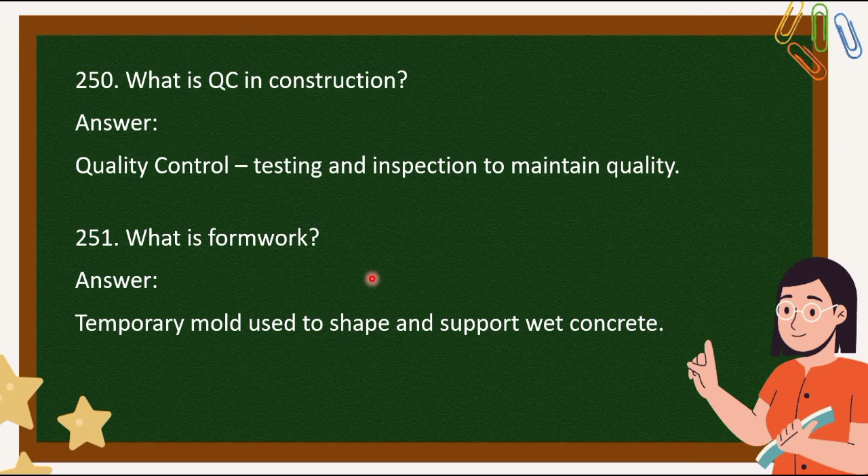What is form work? The answer is temporary mold used to shape and support wet concrete.

What is false work? The answer is temporary support structure to hold form work or arches during construction.

What is the purpose of a tie beam? The answer is to connect two columns and reduce buckling.

What is the difference between tie beam and plinth beam? The answer is tie beam above plinth connects columns, while plinth beam at ground level supports wall load.

What is shear force? The answer is a force that tries to cut a structure across.

What is bending moment? The answer is a moment that causes a beam to bend under load.

What is punching shear? The answer is failure around a column due to concentrated load.

What is a cantilever beam? The answer is a beam supported only at one end.

What is the minimum cover for footing reinforcement? The answer is usually 50 mm. What is the minimum cover for slab reinforcement? The answer is usually 15 to 20 mm.

What is a cube test in concrete? The answer is to check compression strength by testing concrete cube after curing.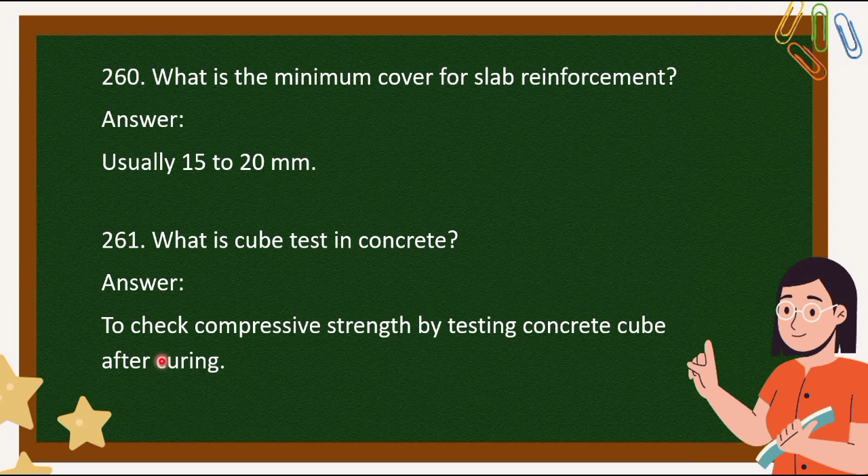What is NDT in construction? The answer is non-destructive test, to test concrete or steel without damaging it.

What is a drop panel? The answer is a thickened slab around a column for better support.

What is a raft foundation? The answer is a thick concrete slab supporting the whole structure, used in weak soils.

What is a strap footing? The answer is a footing connected with a beam to balance the load of columns.

What is combined footing? The answer is one footing for two or more columns.

What is under-reamed pile? The answer is a pile with bulbs to increase bearing capacity in expansive soil.

What is lap length in a column bar? The answer is usually 50 times the bar diameter in tension zones.

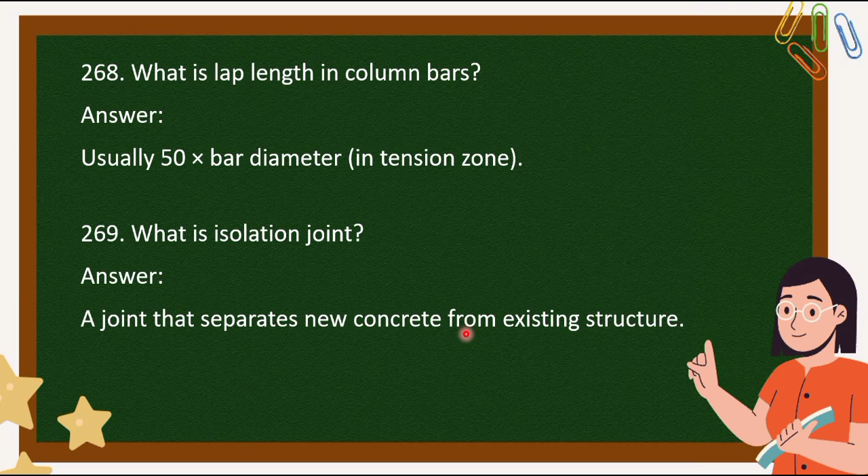What is an isolation joint? The answer is a joint that separates new concrete from existing structure.

What is an expansion joint? The answer is a joint that allows movement due to temperature changes.

What is a contraction joint? The answer is to control where cracks will happen in concrete due to shrinkage.

What is curing compound? The answer is a chemical sprayed to keep concrete moist by sealing the surface.

What is carbonation in concrete? The answer is the reaction of carbon dioxide with cement which reduces pH and causes corrosion.

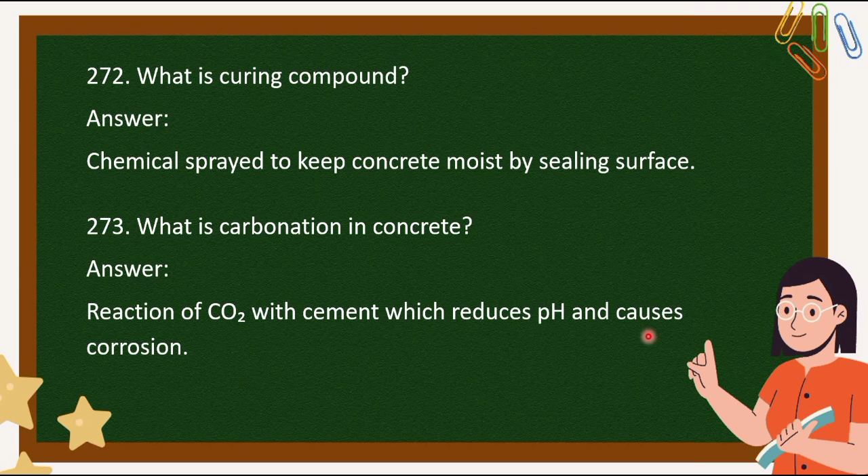What is a pile load test? The answer is to check how much load a pile can carry.

What is development length? The answer is the minimum length needed for a bar to transfer stress to concrete.

What is staging in scaffolding? The answer is a platform where workers stand during construction.

What is raft slab thickness? The answer is usually 300 to 600 mm depending on design.

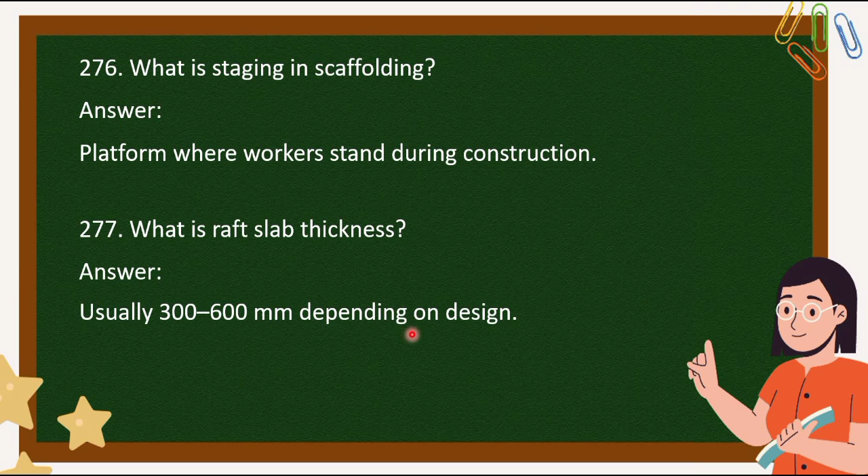What is dry mix concrete? The answer is concrete without water used for small patch works.

What is lean mix? The answer is concrete with less cement content.

What is compaction factor test? The answer is a test to find how workable the concrete is.

What is a construction joint? The answer is a joint made when work is stopped and resumed later.

What is segregation in concrete? It is when aggregates and cement separate due to poor mixing.

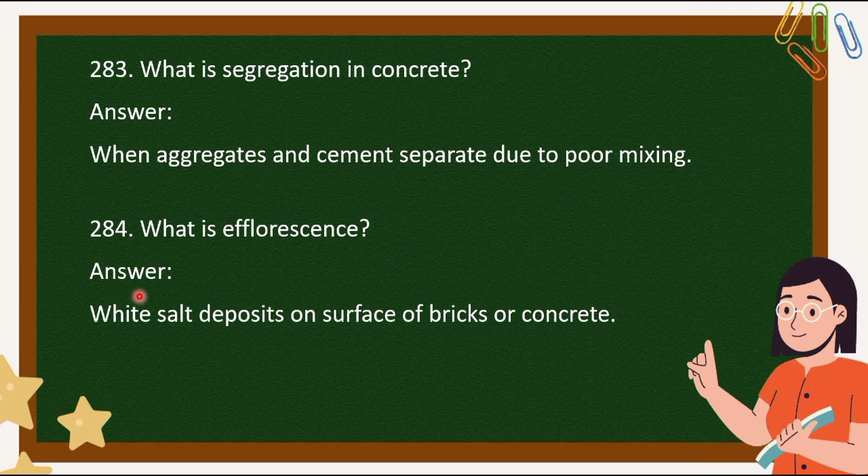What is efflorescence? The answer is white salt deposits on the surface of bricks or concrete.

What is a brick frog? The answer is a depression on top of a brick to hold mortar.

What is the volume of one bag of cement? The answer is 0.035 cubic meters, 35 liters, or 1.25 CFT.

What is a typical water cement ratio? The answer is 0.4 to 0.6 depending on use.

What is a gabion wall? The answer is a wall made of stones packed in wire mesh used for erosion control.

What is the use of geotextile? The answer is fabric used to improve soil strength or filtration.

What is pavement? The answer is the surface layer of roads made for vehicles.

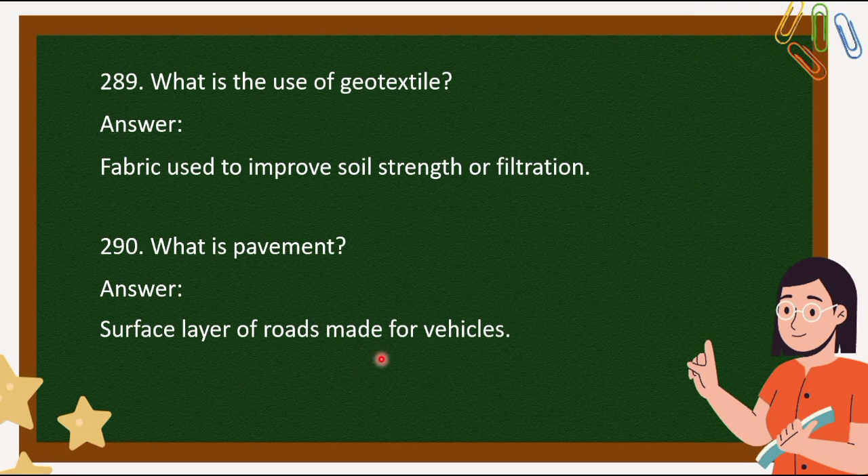What is tack coat? The answer is a thin bitumen layer between old and new asphalt layers.

What is prime coat? The answer is a bitumen layer over the base to prepare for asphalt.

What is seal coat? The answer is a protective coating on the road surface to extend its life.

What is the difference between rigid and flexible pavement? The answer is rigid pavement uses concrete roads, flexible pavement uses asphalt roads.

What is IRC? The answer is Indian Roads Congress, which sets road design codes in India.

What is model provision? The answer is tender rules in construction code.

What is HDPE pipe? The answer is high density polyethylene pipe used for water and drainage.

What is BBS used for? The answer is to calculate the quantity and shape of steel bars in structures.

What is load factor? The answer is a safety multiplier used in design to account for uncertainties.

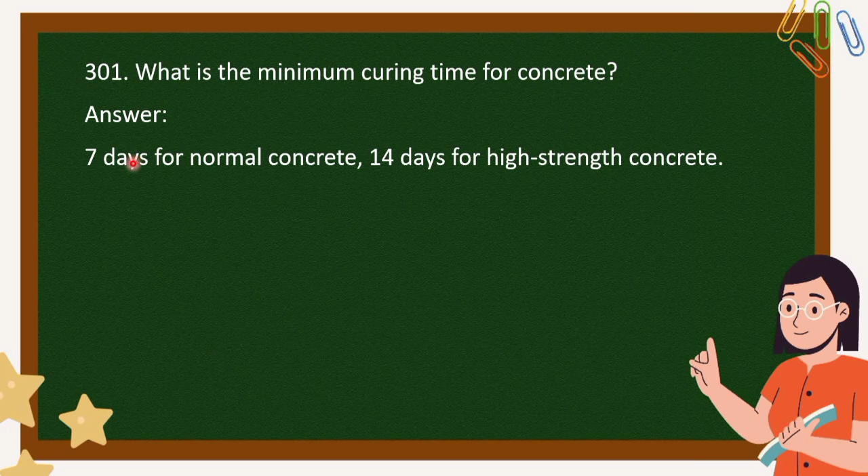What is the minimum curing time for concrete? The answer is 7 days for normal concrete, 14 days for high strength concrete.

What is quick setting cement? The answer is cement that sets quickly, used in underwater or cold weather works.

What is the purpose of the slump test? The answer is to check the workability and flow of fresh concrete.

304 number question. What is the standard slump for RCC works? The answer is 75 to 100 mm, medium workability.

What is fly ash? The answer is waste from power plants used as a cement replacement. What is GGBS? The answer is ground granulated blast furnace slag used to improve concrete strength and durability. What is admixtures? The answer is chemicals added to concrete to improve workability, setting time, or durability.

What is a retarder? The answer is an admixture that slows down setting time. What is an accelerator? The answer is an admixture that speeds up setting time.

What is honeycombing in concrete? The answer is voids or gaps in hardened concrete due to poor compaction. How to repair honeycombing? The answer is chisel out the weak area and fill with non-shrink grout.

Cofferdam: the answer is a temporary barrier to hold back water while working on foundations. What is Caisson disease? The answer is a health issue caused by fast pressure changes in deep underwater work.

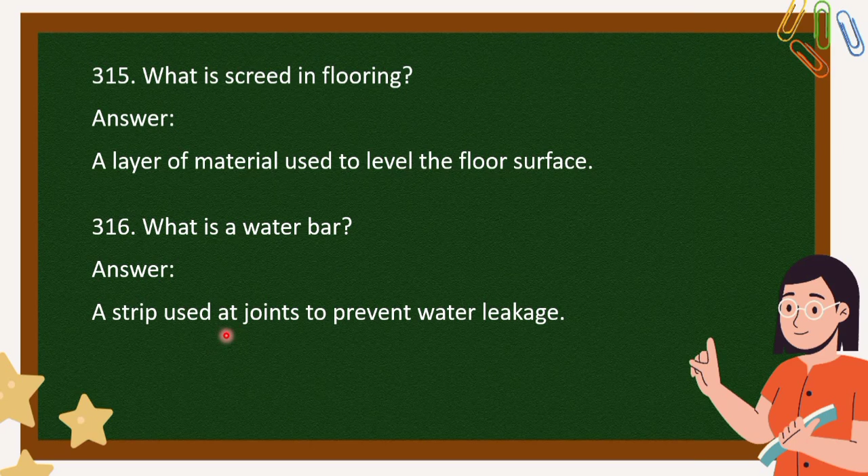What is a water bar? The answer is a strip used at joints to prevent water leakage.

What is the minimum slope for drainage? The answer is 1 in 100 for proper flow.

What is backfilling? The answer is filling the excavated area after construction. What is shotcrete? The answer is sprayed concrete used for tunnel or slope protection. What is gunite? The answer is dry mixed shotcrete concrete sprayed using compressed air.

What is fiber reinforced concrete? The answer is concrete with steel, glass, or plastic fibers to increase strength.

What is a concrete cover block? The answer is a small block used to maintain spacing between steel and shuttering.

What is the standard size of concrete cube for testing? The answer is 150 mm by 150 mm by 150 mm.

What is a diaphragm wall? The answer is a deep wall used for earth retaining and foundation support.

What is a retaining wall? The answer is a wall built to hold soil at different levels.

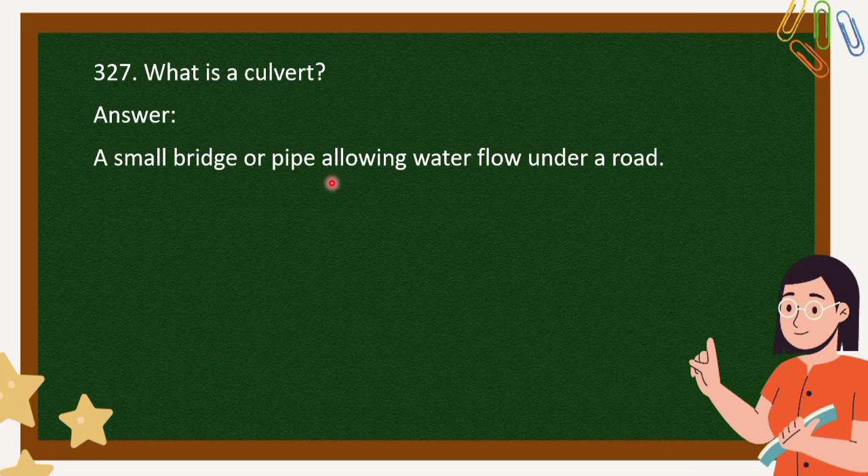What is geogrid? The answer is a mesh used to reinforce soil in retaining walls or slopes. What is a culvert? The answer is a small bridge or pipe allowing water flow under a road.

What is water cement ratio? The answer is the ratio of water to cement in a concrete mix.

What is the effect of high water cement ratio? The answer is weaker and less durable concrete.

330 number question. What is silt content in sand? The answer is clay or dust in sand, which should be below 8%.

How to test silt in sand? The answer is by using a clear jar with water and letting it settle.

What is the minimum grade of concrete for RCC? The answer is M20, 1:1.5:3 mix ratio.

What is dry lean concrete? The answer is low cement concrete used as a road subbase. What is a bituminous road? The answer is a flexible road made from bitumen and aggregates.

What is a concrete road? The answer is a rigid road made with reinforced concrete.

What is the average width of a lane? The answer is about 3.5 meters per lane.

What is super elevation in a road? The answer is raising the outer edge of the road on a curve for vehicle safety.

What is camber in a road? The answer is a slope from center to sides to drain water.

What is crust in road pavements? The answer is the layers like base and surface layer of the road.

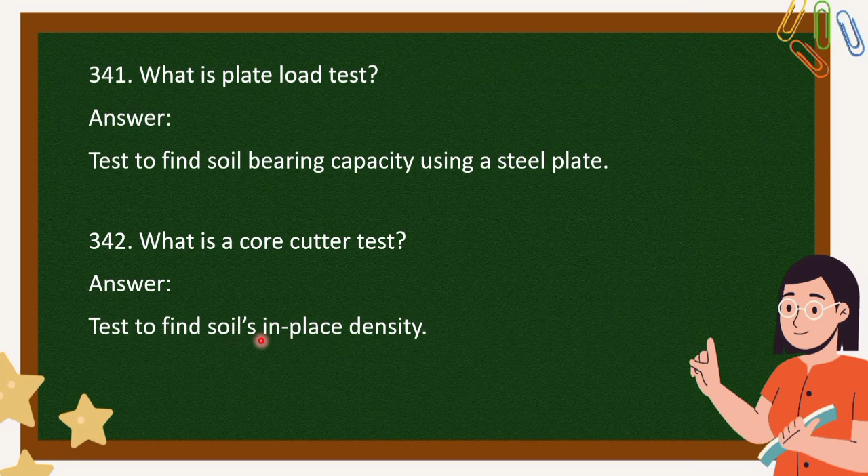What is standard penetration test, SPT? The answer is a test to find soil resistance by driving a sampler into the soil.

What is Proctor test? The answer is a test to find optimal moisture for soil compaction.

What is the California bearing ratio, CBR? The answer is a test to measure soil strength for road subgrade.

What is grouting? The answer is filling cracks or spaces with cement paste or chemicals.

What is a tremie pipe? The answer is a pipe used to pour concrete underwater.

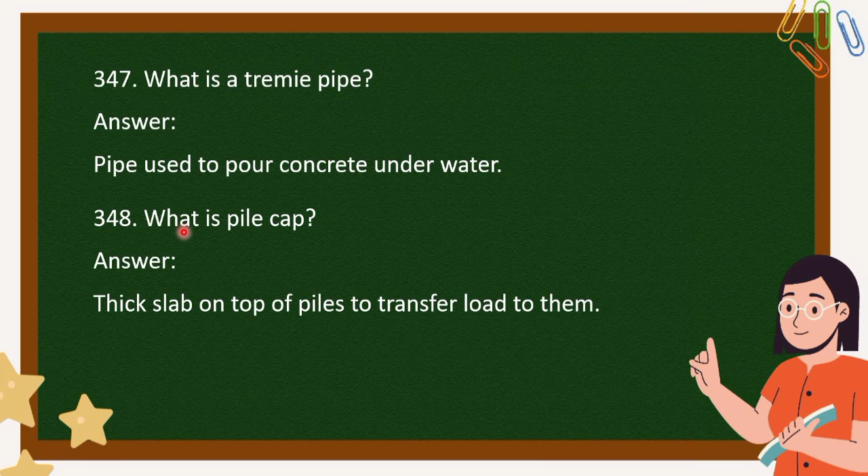What is a pile cap? The answer is a thick slab on top of piles to transfer load to them. What is ductility? The answer is the ability of steel to stretch without breaking.

350 number question. What is corrosion of reinforcement? The answer is rusting of steel bars inside concrete causing damage.